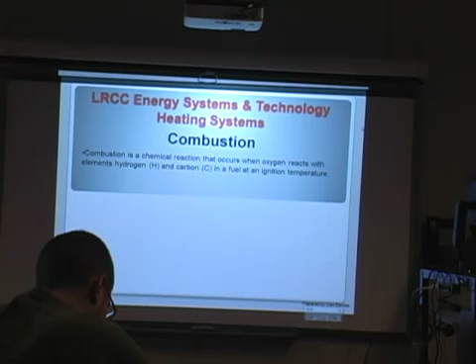Combustion is a chemical reaction that takes place. It occurs when oxygen, primarily contained in air, reacts with hydrogen and carbon, which comes to us in the fuels.

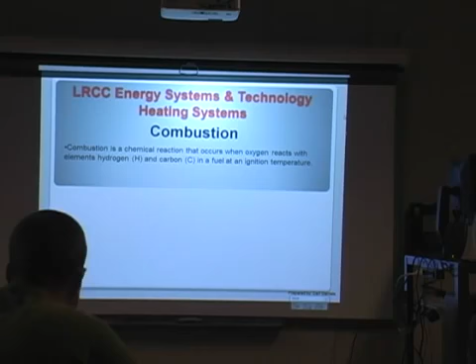So we have a couple of different things intersecting here. We have hydrogen and carbon coming in as a mixture of fuel, whether it be propane, oil, or coal. And then we have oxygen coming in as air. We usually introduce that as air.

An element is a pure matter that cannot be broken down. Anything that's an element is a pure matter that cannot be broken down into simpler substances.

Ignition temperature is the intensity of heat required to start a chemical reaction, whether that reaction is with coal, oil, or wood. The ignition source is that intensity of heat that will start the reaction. Fuel, oxygen, and ignition temperature come together in this triangle, if you will, to create what we know as fire.

So when we're looking at fire, when we see fire, we see flames, we know that we have to have all three components: fuel, an ignition source or ignition temperature, and oxygen. If any one of those three items is missing, the fire goes out.

Combustion air is what we're primarily going to talk about in terms of the oxygen being introduced to the triangle. Combustion air is the air that brings that oxygen to the fuel for the combustion. The precise amount of air depends on the fuel being used in the equipment, and all heating systems using combustion must have air.

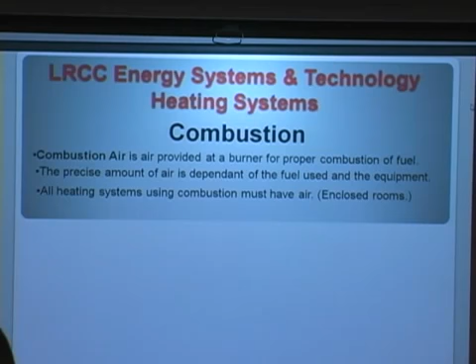So we have to keep that in mind when we're talking about weather-tightening homes and sealing up homes. This is one of the issues we have to concern ourselves with, because as we go along to stop infiltration from coming into the house, since we don't want to lose our heat, we also have to be concerned with what we're doing to the combustion products or combustion appliances located in that dwelling, the house or building. So we have to have a delicate balance here.

The oxygen comes from the combustion air that's delivered, and usually it consists of approximately 20.95%, or 21%, oxygen and about 78% nitrogen in that air. The nitrogen will go through a fire, through this transition, untouched.

So when you introduce oxygen to fuel and also the ignition source, and you go into the reaction, which is a flame, nitrogen is what we call a pass-through. It just passes through the flame and does not change state at all. So if you have X amount of grams, say 10 grams of nitrogen going into the flame, you're going to have 10 grams exiting the flame as what we call combustion byproduct, or combustion products, which we'll talk about in a minute. During the combustion, though, the oxygen will react with the elements of the fuel and create the combustion.

The fuel-air ratio for burning natural gas, which we usually focus on because it's popular, needs to be about 86 to 96% air, 4 to 14% gas, depending on whether you're using an atmospheric burner or a forced air burner.

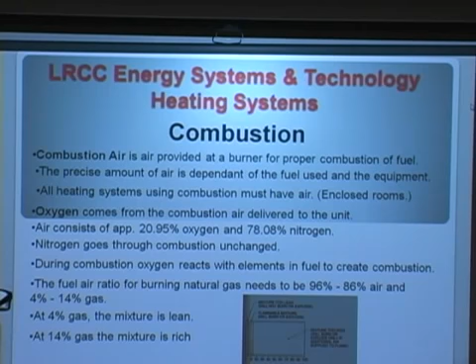If we have 4% gas, we consider that a lean fire, meaning we have very little gas in the fire and more oxygen than gas. If we have 14% gas, that's considered a rich flame or rich fire. So if a burner is running rich at 14%, its efficiency is probably down because it's utilizing more gas, and that's what you're paying for, since oxygen is free. The gas is what we pay for.

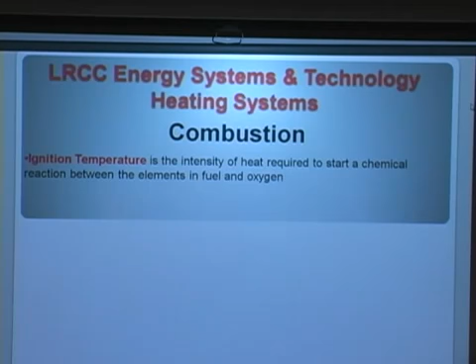Let's talk about the components for a minute. The ignition temperature can come to us in various ways when we talk about appliances, but it's the intensity of heat needed to start that chemical reaction taking place between the fuel and the oxygen. The ignition source is what starts the chemical reaction.

It can be provided by a spark plug type ignition source, a pilot light ignition source, or any other means. We have glow plug type ignition sources too, so somehow we have to introduce that ignition source. You can have oxygen and fuel residing side by side or even mixed together and have no flame. If you don't have the ignition source, you will have no flame. And we all know that. How do we know that? When do we see that a lot?

Anybody know? Kevin, I'm going to pick on you. When do we see fuel and oxygen mixed together and it does not fire? Because we're missing an ignition source.

You've seen that? When we have delayed ignition, anybody have experienced delayed ignition in a furnace, oil fired? Is it the correct room pressure?

No, it's when we literally have delayed ignition in a boiler or a furnace because for some reason the sparks don't work on the end of the electrodes. So what happens is the burner turns on, the pump runs, the fan runs, it mixes the oil and the air together, it comes out into the fire chamber, and it just sits there. Then all of a sudden, a few minutes later it decides to light and you get that pow, and you hear your furnace rumble, boom. So there's an instance where oxygen and fuel are mixing and coming out, but because they don't have the ignition source, they're not firing.

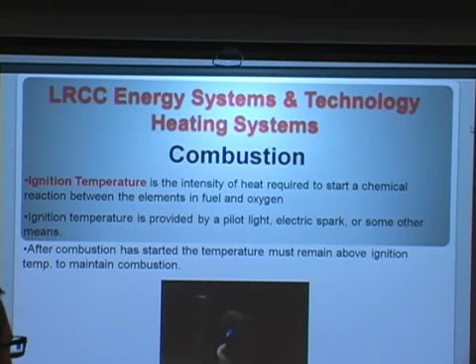This is a picture of what we typically see as a spark igniter, like on gas grills all the time. You hit the button and it gives out a spark to ignite. Another example: you turn on your gas grill and you've got propane coming out, mixing with oxygen in the burner tube between the fuel and the oxygen, but you don't get a flame until you hit that button or light that match. Hopefully you light it fairly quickly, or else you end up with singed eyebrows.

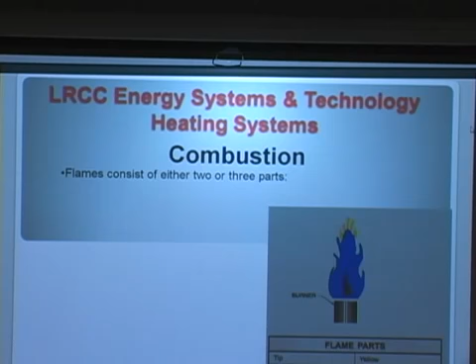When we look at flames, we're looking at combustion. We talk about gas flames because they're an excellent example of how combustion works. When we look at a gas flame, we have three components. The first component is what we call the inner mantle, and this is where you have a very rich flame.

The second is the outer mantle. The inner mantle is rich because this is where the hydrogen in the fuel mixture is burning, reacting with oxygen in the middle of the flame. The outer mantle is where the carbon is meeting the oxygen and burning, because carbon is another product of the fuel. Carbon burns slower than hydrogen, which burns very easily and very rapidly.

Carbon burns very slowly, so the carbon is in an outer mantle, which is more of a light blue. When you're looking at a natural gas flame, you'll see the center of the flame, the heart of the flame, is deep dark blue. Then you'll have a lighter blue flame surrounding it. And then you'll have the outer tips at the very top that will flash off in a little bit of yellow.

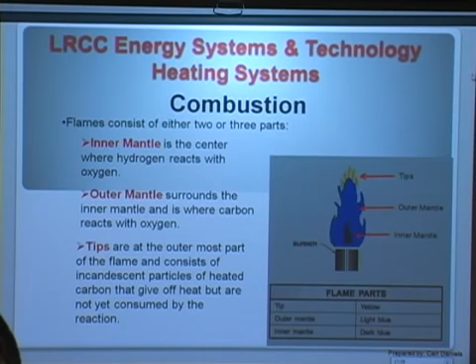That's the carbon that's made it through the whole reaction untouched, so it doesn't give off much heat. Your yellow tips don't give off much heat. Your inner mantle is where the largest source of your heat is, your outer mantle has the next largest source of heat, and of course your tips have the least.

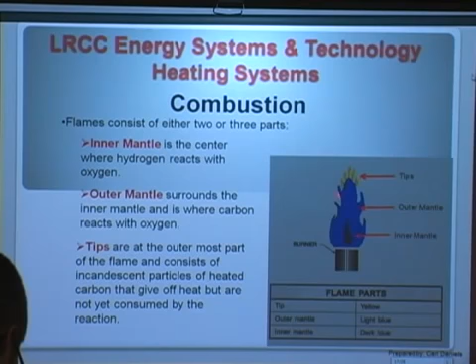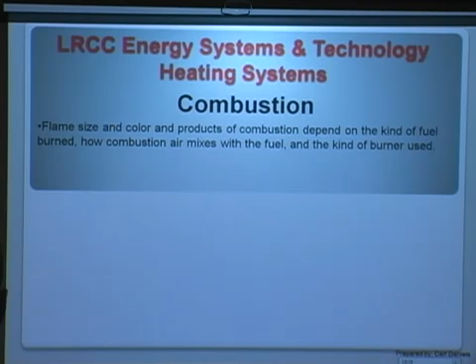The color and size of the flame will depend on the type of fuel being used, how the combustion air mixes with the fuel, and also the type of burner we're using. We can have natural gas burners with a whole slew of holes over 2 or 3 feet length of burner tube, or small gas burners like you see on your cooktop that are just round. So we have various types and shapes of burners.

The burner face is pretty much where the flame is established, on the tip of the burner. The burner flame usually mixes the air and oxygen and the fuel before it enters the burner. So the key here is, on all burners, all types of combustion, the first thing you have to do is mix the air with the fuel.

And the better the mix — you'll see this in another presentation — the better the mix of the air and the fuel, the more efficient the burn is going to be.

In a natural gas burner, we have the luxury of mixing the air and the gas early on, usually in the burner tube. As the gas is exiting the manifold through the spud and the orifice, and it comes out into the burner tube, we introduce oxygen right behind it. Through Venturi action down the burner tube, the air and fuel will mix, so that when the fuel and air mixture exits the burner tube to the ignition point where the pilot is, it's very well mixed.

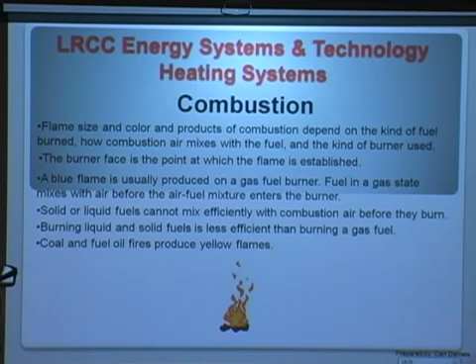So when you look at a natural gas flame, you have that inner and outer mantle that's blue, dark blue and light blue. But when you look at a coal-fired or oil-fired combustion flame, it's yellow and white. That's a result of the oxygen not being able to mix 100% with the fuel, as can happen in gas. Everybody with me? Make sense?

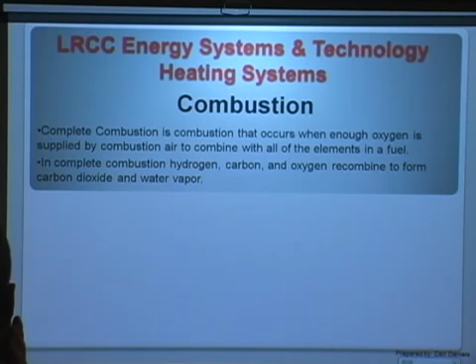So in complete combustion, you've got hydrogen, carbon, and oxygen coming in, they recombine, go through the process, and form carbon dioxide and water vapor. Again, the nitrogen is just passing through the flame totally untouched.

The chemical energy that's in the fuel is changed to thermal energy. That's where we get the heat from. The reactionary process that takes place in combustion is what produces the heat. There's no loss or gain of energy, because energy cannot be created nor destroyed. All we're doing is transferring it.

So your air is coming in with its oxygen. Your fuel is coming in - this is propane, it's got the hydrogen here, it's got the carbon. You've got your nitrogen coming in down here with the air. So here's your fuel, introducing your hydrogen and your carbon. Here's your air, bringing in your oxygen and your nitrogen.

Now, because laws of nature tell us that it cannot be created nor destroyed, what comes into this reaction has to come out of this reaction, quantity-wise. So what happens is the nitrogen is a pass-through - for every molecule of nitrogen coming in, we have a molecule of nitrogen coming out.

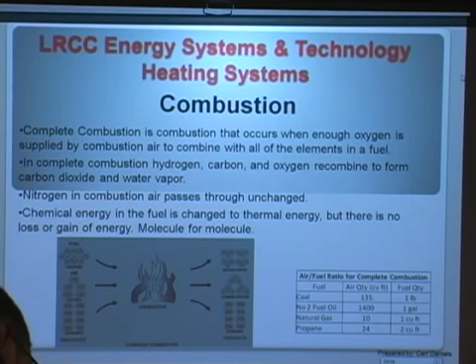Immediately it tries to fire. But the mixture time is very short. The time that the oil and the oxygen have to mix is only seconds or milliseconds, compared to a natural gas burner. The air, oxygen, and gas start very early in the tube and mix as it's going down. Well, with oil, it's all taking place on the face of the tube. So the time they're together is short, and that's why with oil we have to introduce far more air than with natural gas, because we're just trying to whack it together.

So incomplete combustion is improper combustion that occurs when there's not enough oxygen, which is usually the case. We're starving the fire for oxygen, and we develop incomplete combustion. So when we do that, we're producing carbon monoxide, and as we all know, carbon monoxide is not healthy for us. Very unhealthy.

And then the aldehydes come out very acidic, and this is why, especially on an oil-fired furnace or boiler, you'll see at the barometric damper this yellowy powder developing on the galvanized pipe along with soot, because the aldehydes are mixing and breaking down the galvanized metal. That's what's turning yellow, because it's acidic.

The aldehydes contain hydrogen, carbon, and oxygen. They have a harsh odor. If you've ever walked into a house that doesn't have a good flue, you can feel it, taste it in the back of your throat, kind of a metallic taste. That's that harsh odor, it'll make your eyes and nose burn a little. Remember, carbon monoxide you cannot taste or feel or sense - you just start developing symptoms: nauseated, stomachache, sleepiness, headaches. The aldehydes, on the other hand, you can walk in and almost taste it on your tongue.

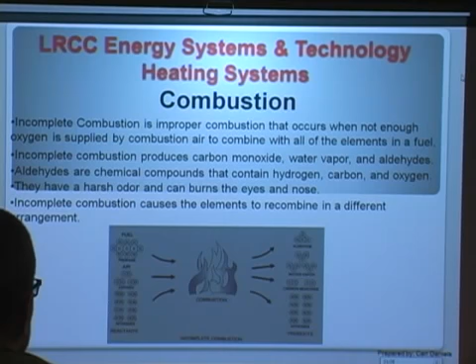So, same picture, this time incomplete combustion. Again, we're introducing the fuel, which has hydrogen and carbon, and the air, which has oxygen and nitrogen. The nitrogen passes right through, one-for-one ratio, no change. However, with incomplete combustion, looking at the mixture of fuel and air, we're going to have a certain amount of aldehydes - hydrogen, a little carbon, and a little oxygen mixed in. Then we'll have water vapor, which is hydrogen and oxygen, and a lot of carbon monoxide, which is that carbon component - that yellow flame. That's what's in the yellow flame, that's what's coming out yellow, the carbon monoxide.

So when we look at combustion efficiency, we're evaluating the chemical reaction that takes place, primarily by monitoring the carbon monoxide and carbon dioxide coming out of that flame, because that tells us how efficiently we're burning. If we're burning extremely efficiently, I'm going to see high levels of carbon dioxide. If I'm burning poorly, I'm going to see high levels of carbon monoxide.

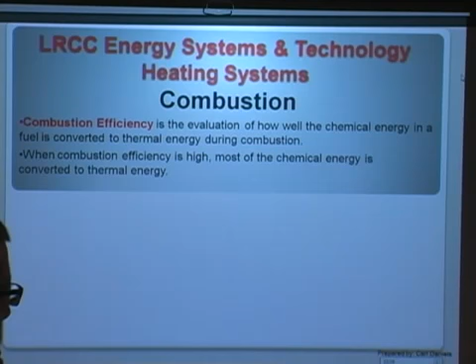When efficiency is high, most of the chemical energy is converted to thermal energy, because if efficiency is high, I'm burning all of the carbon content of the fuel that I possibly can. If I'm leaving carbon behind, not burning it, which produces yellow flame and carbon monoxide, then I'm not going to get as much thermal energy out of that reaction as if I was burning all of the carbon, because the carbon is part of the fuel.

When combustion efficiency is low, we're wasting the chemical energy and producing dangerous products at the same time. Those dangerous products can come into the living space or occupancy space. And if we're exiting those products out the chimney, this is also contributing to global warming. The more carbon monoxide I kick out, the more inefficient the flame, the worse I'm going to be.

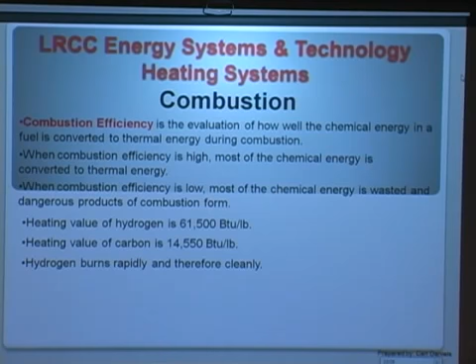For hydrogen, the heating value is 61,500 BTUs per pound. For carbon, it's only 14,550 BTUs per pound. So obviously my hydrogen gives me the biggest bang for the buck out of my fuel, but I still don't want to leave carbon behind. If I was not burning any of the carbon whatsoever, I'd be leaving behind 14,550 BTUs per pound, which is a lot. Hydrogen burns rapidly and very cleanly, while carbon burns very slowly.

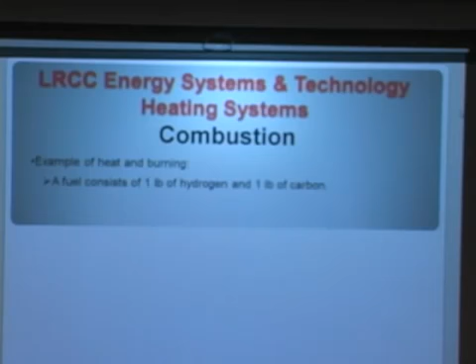When we look at fuel and combustion, fuel usually consists of 1 pound of hydrogen and 1 pound of carbon in this example. The complete combustion of 1 pound of hydrogen requires 8 pounds of oxygen. The reaction will produce 9 pounds of water vapor and 61,500 BTUs. For complete combustion of the carbon, we need 2 2/3 pounds of oxygen for the carbon alone. That reaction will produce 3 2/3 pounds of carbon dioxide and 14,550 BTUs.

If we add the carbon and hydrogen reactants together, we come up to 70,050 BTUs total. This illustrates that even with incomplete combustion, we're still going to burn all of the hydrogen. If I have my worst flame, my hydrogen's still going to burn, so I'll still get 61,500 BTUs. However, if I burn all of my carbon with the hydrogen, now I'll get 70,050 BTUs. Otherwise, I'm leaving that 14,000 on the table. That's where we get our efficiency—you're still buying the fuel that contains the carbon, so you're still paying for all of it. It's what you actually get out of it that matters.

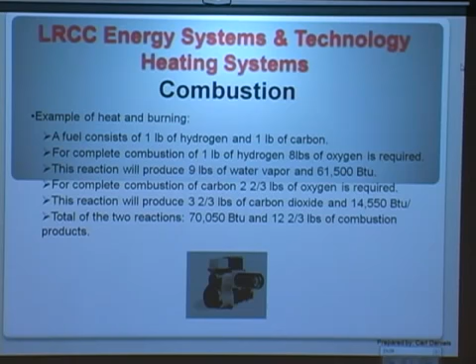So how we know that is - I'll show you this in a minute, I'll pass it around - we use a combustion analyzer where we go in and sample the combustion products and see what we're getting, and it tells us where our efficiency is. That's how we can tell what's happening in this flame.

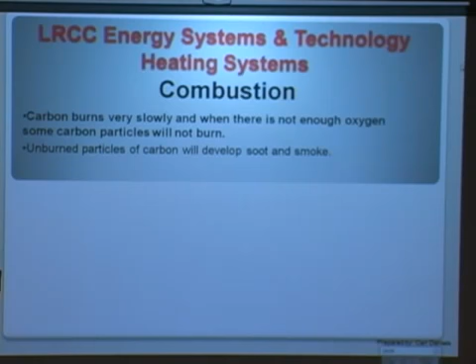So we've talked about how carbon burns slowly, and if we don't get enough oxygen, the carbon won't burn at all. A telltale sign of exiting carbon is soot. You can tell even before you pull your analyzer out - if you walk into the basement of a home and you're looking at an oil-fired appliance, whether a water heater or furnace, and you see black soot around the rings of the elbows, on the breeching, on the flue, you can tell right off that there's a lot of carbon coming off that flame, because carbon produces soot.

Just like a candle - when you see a candle burning, the wax, and you see the black soot coming up, that's all carbon coming out. So a telltale sign without the instruments is just to look for the evidence - look for the soot, look for that yellow powder created by the aldehydes.

Sometimes if it's bad enough, and I've seen this, you can stand outside and look at what's exiting the chimney. If you see black smoke coming out of the chimney of an oil-fired appliance, you're really burning bad. You shouldn't see visible smoke - don't mistake smoke for steam, you may see white steam, that's common. But if you see black smoke coming out of a chimney on an oil-fired furnace or boiler, you're really burning bad.

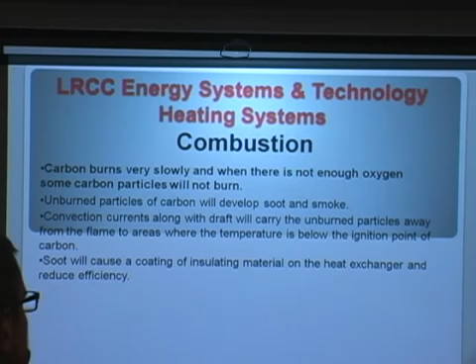Question: When soot builds up on the heat exchanger and reduces efficiency, say in a boiler, will it take longer for the water to heat up, or will the system recognize it and push more fuel in? No - the system won't. That nozzle's fixed, unless you have certain boilers that sense outdoor temperature and inside temperature and adjust flame for that. But we don't have anything that senses soot buildup and says 'burn higher because you sooted up.' So no, usually they're fixed.

So for maximum efficiency, 5 to 50% excess air is required for combustion, and this is something we get into when dealing with how much air to bring in. We call it excess air - the term we use for combustion air coming in. Too much air can also rob you of efficiency, because if we bring in too much air, we're just going to draft everything right up the flue. So it's one of those things where you have to have just the right amount.

You can't just say, alright, you said enough, I'll just blow this thing with all the air I can. Too much air is too much air. Too much air will just take the heat and rob the heat exchanger of the heat that it needs to pass through to the home.

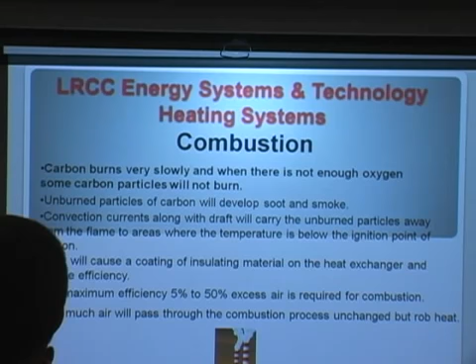So we do efficiency testing by measuring the flue gases. We also measure how much oxygen is coming out of the gas, and we measure excess air going into the flame. We measure the percentage of carbon dioxide in the gas, because that'll tell us. Recommended levels for carbon dioxide if you're dealing with a natural gas fired burner is 8 to 9.5%. Recommended carbon dioxide levels for number 2 fuel oil is anywhere from 10 to 12.5%.

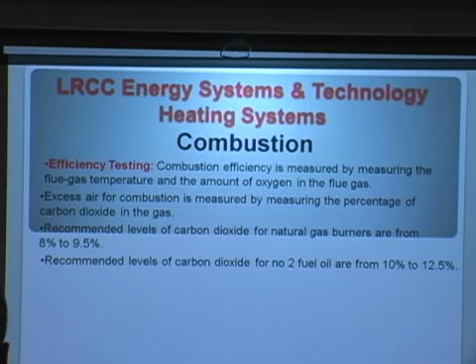I'm going to pass this around. What we do is take this device - it has a pump on it, and the pump literally sucks air right out of the flue. We inject this into the flue.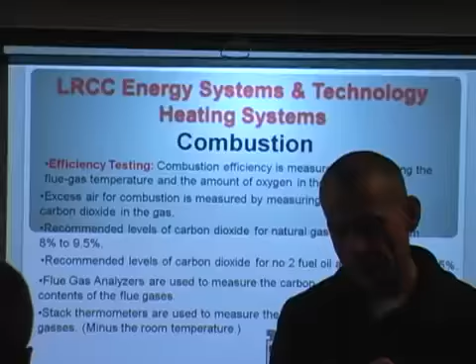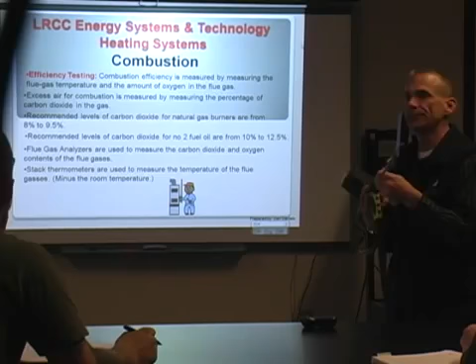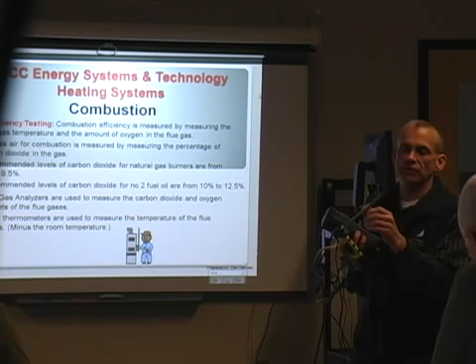So we drill, if it's not already there, a quarter-inch hole in the flue. We position this probe into the flue until it reaches its highest temperature, so we know we're positioned right. This is just a little slide so you can hold it there - once you find that sweet spot, the high temperature spot, you just adjust it so you don't have to constantly move it, you can just lean on it.

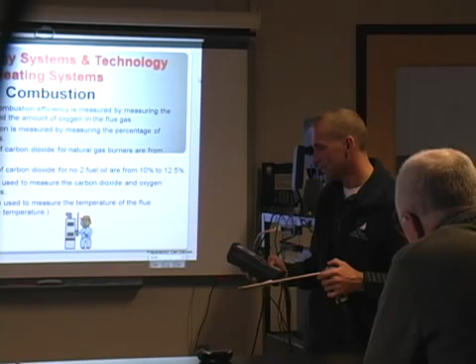And then when we turn this on... there it goes. When we turn this on, you'll hear a pump kick in.

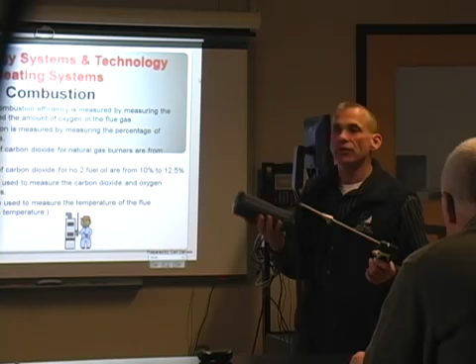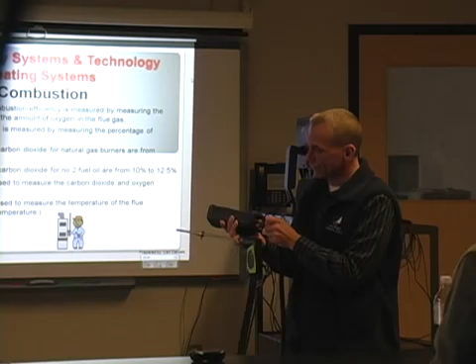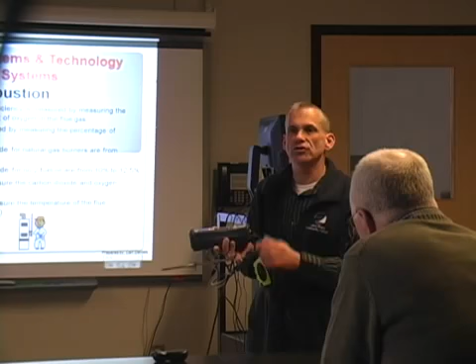You can barely hear the pump, and it's drafting, it's drawing air in. This thing, and most of these today, will give you all the information you need right out of the gate. In other words, it'll calculate your efficiency for you directly. All you have to do is punch in what you know, whether you got number 2 fuel, natural gas, or propane. There's no calculating. The older units, you used to have to go to slide rules and charts and everything else. This has a water trap on it, so it'll prevent water from getting into the instrument, because we're pulling out some vapor from the flue. So it's pretty simple to use.

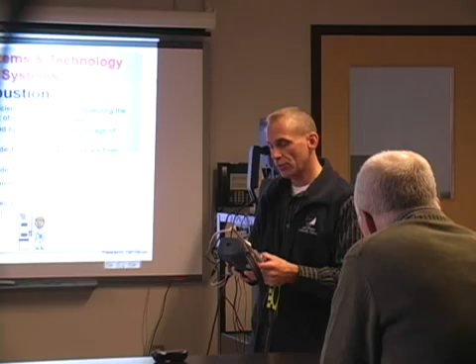Wait for it to get through the warm-up cycle. When you pass around, you'll see, and I'm hoping I have one stored on here. It's warming up.

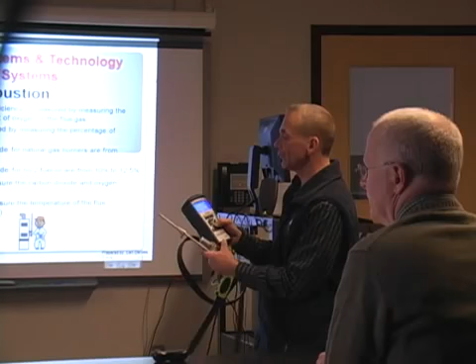Okay, so when you look at this, the first thing you'll see on the display is it tells you what fuel you want to pick, and then if you hit the button again, it gives you natural gas, number 2, number 4, number 6, propane, kerosene, wood. This will do wood, coal, and that's about it. So I guess wood pellets would be wood, if you know, wood pellets is the biggest thing.

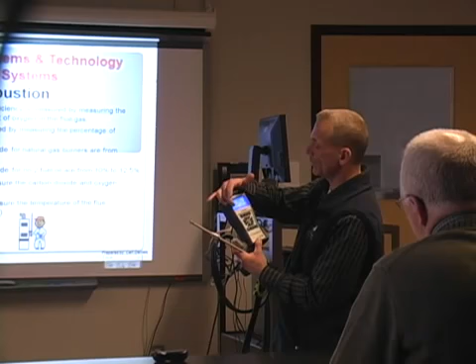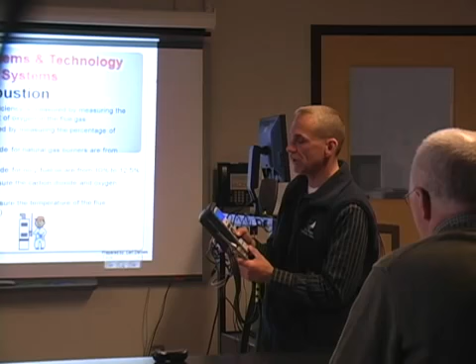And then I'm going to leave it on the third page, which shows you the different readouts. You have your O2, your CO, your efficiency, and your CO2. Gives it to you all automatically, calculates it for you. You don't have to sit there and calculate your efficiency. It'll tell you exactly what your efficiency is. It'll also give you your stack temperature, your entering air temperature. So I'll leave it on that page so you can see the typical readout.

So this is what we're doing. Again, we're analyzing the products of combustion, because that's what tells us how complete combustion is. It's pretty simple there.

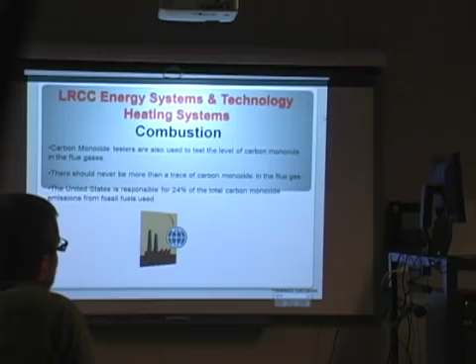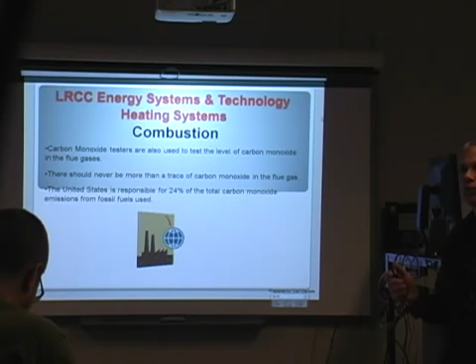And this just talks about how these are used. In the United States, we are responsible for 24% of the carbon monoxide emissions from fossil fuels from our country—maybe this is higher now, this may be old data. So next time you're driving down the road, hopefully you're looking at houses differently today than you used to. When you're driving down the road, if you're looking at chimneys and you see black smoke coming out, and especially if you see oil pipes on the side of the house, you know right away it's oil feeding that house. We're feeding carbon monoxide into the atmosphere. All that black smoke, that's all carbon monoxide going into the atmosphere.

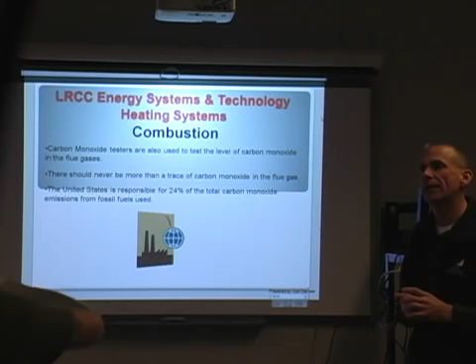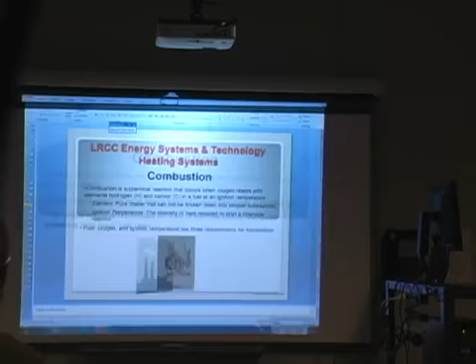Okay, all right, I'm not going to give you homework. Next year you'll have it. Let me show you. Any questions?

I have this. I have a question. Sure.

Approximately how much air does a wood stove hold, do you know?

I don't have that on my head, Wes, but I know we have it in our book. If you look at the heating book, we have it for wood, how many—we have all that in there for wood.

This is an incomplete presentation I have, so we'll muddle through it a little bit. And I'm going to be honest, this is some of Wes's material I took and mixed it around. Remember, you sent me over that PowerPoint presentation you had.

Okay, so this is talking about, a little bit more detail on how we do this testing. We test some of the things for fuel pressure coming in. We're going to test for draft. Draft is important because we can have an overdrafting situation which will give us excess air. If we're pulling too much air through the burning appliance, across the flame, we're going to have that same situation I talked about earlier.

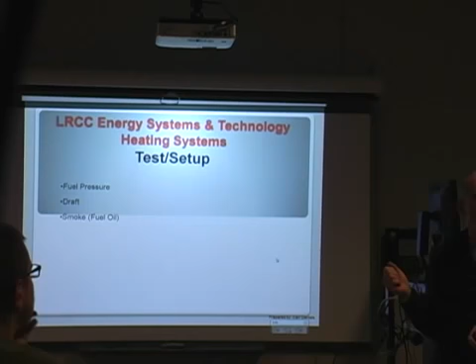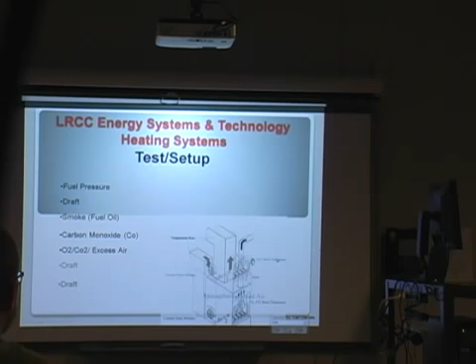As we talked about, we test for monoxide, dioxide, and excess air. This is a typical atmospheric forced hot air natural gas system. It's an atmospheric burner, which means it has no power vent going into the burner. And in this case here, this is your flue going up to your chimney.

We put a 1/4-inch hole, as I talked about. We have to insert this probe into that draft, so we drill a 1/4-inch hole right on the top here. We also take our stack temperature readings right off the top on this type of appliance, right as we come out of the breeching. And then, of course, you can measure the efficiency.

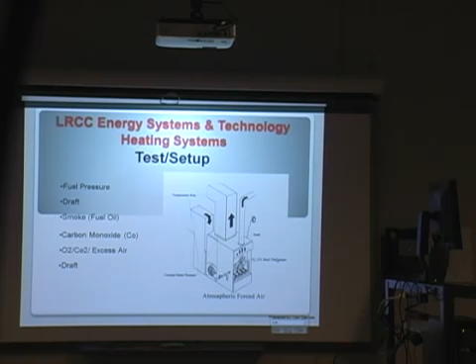Also, we can calculate efficiency, and we did this in the heating class last week with your temperature rise of your air entering and exiting the appliance itself. We won't get into that here.

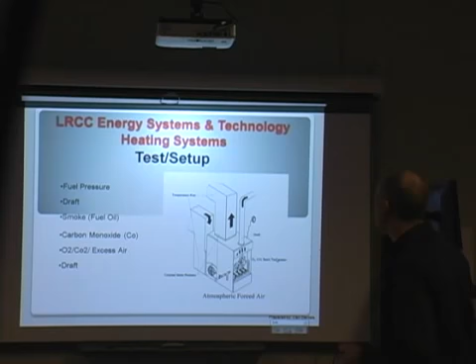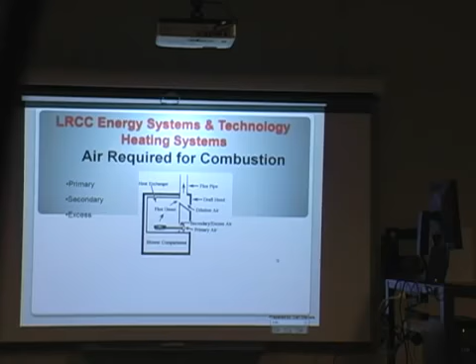So what's required for combustion is primary and secondary air, and then what we call excess air. This is natural gas, again what we call an atmospheric burner. In an atmospheric burner, we introduce primary air into the burner tube. This is what I was talking about earlier. And then we introduce secondary air around the burner tube at the face of the burner tube here. So your primary air and your natural gas are mixing the whole entire time that it's traveling down that tube.

So in this situation, not only is the oxygen in the same state as the fuel, both in a gas state, and they have that luxury of mixing, they also have the luxury of having a lot of time to do it, traveling down this tube. And then they also have the ability to introduce secondary or excess air around the tube. So you get a real good mixture with gas, propane, LP, natural gas.

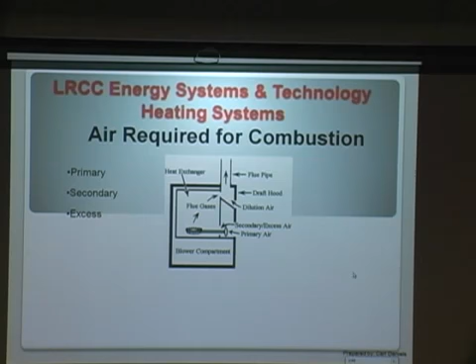And then we have our reaction taking place right here, where our ignition source will be. The flue gases, that's where our reaction takes place. Then the flue gases are going to come up through this area where it's extracting the heat from the flue gases to heat the air. And then it's going to start heading up the flue. So we're going to be measuring here and here with that meter that just went around the room. That's where we take our measurements.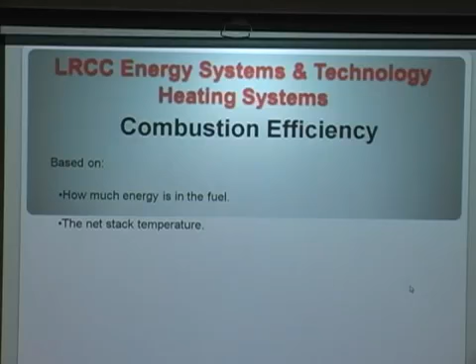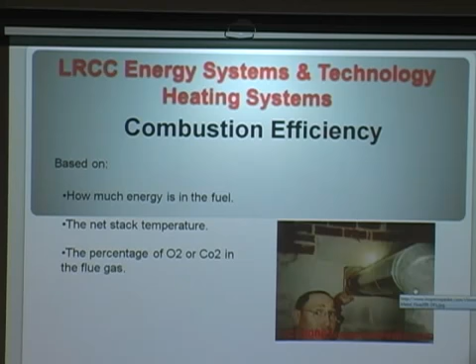So combustion efficiency is based on how much energy is in the fuel, as we calculated in the earlier slides. It'll depend on what the net stack temperature is, because again, we're extracting the heat out of that combustion gas. That's where we're getting the heat, not from the flame. We're depending on the flame to produce the hot combustion gases, which is where we extract the heat. And then we look at the percent of oxygen, O2, in the flue gas. Again, just different examples where we're looking.

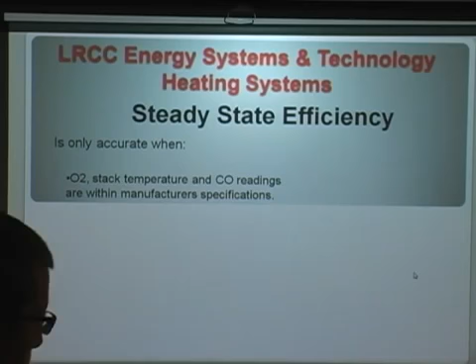It's only accurate when your oxygen, stack temperature, and CO readings are within manufacturer specifications. So you have to have an idea. Even so, this is calibrated for standard equipment, and we have all kinds of charts for standard equipment, but you always, whenever possible, should be referring to the manufacturer's specifications. And we see that it'll either be stamped on the appliance, or it'll be found in the nomenclature you get with the appliance when you buy it.

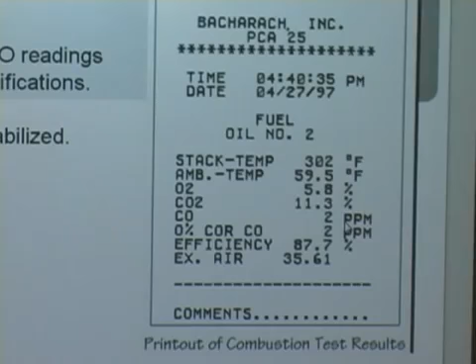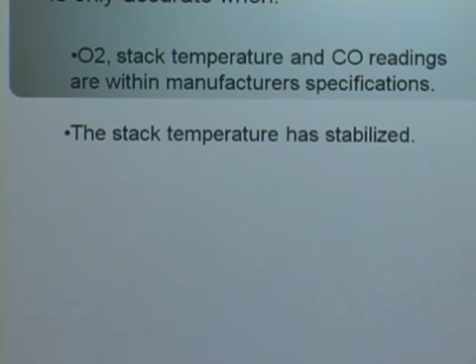Then we have to make sure we're taking our readings once the stack temperature is stabilized, because you're going to have what we call run-up. Run-up is the time it takes for a cold appliance to sit there, start on a cold start, and then come up to temperature. So you have to turn the appliance on, watch your stack temperature, and wait for it to equalize, wait for it to reach and stabilize. Once it stabilizes, then this is a typical readout.